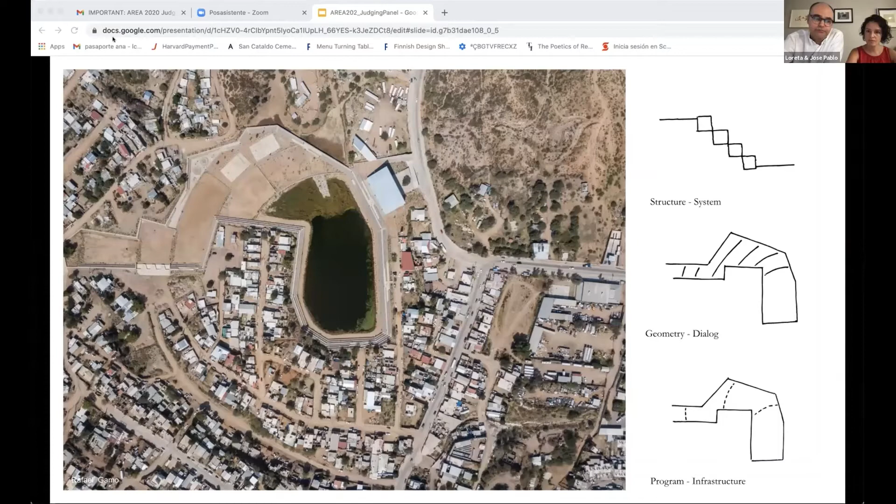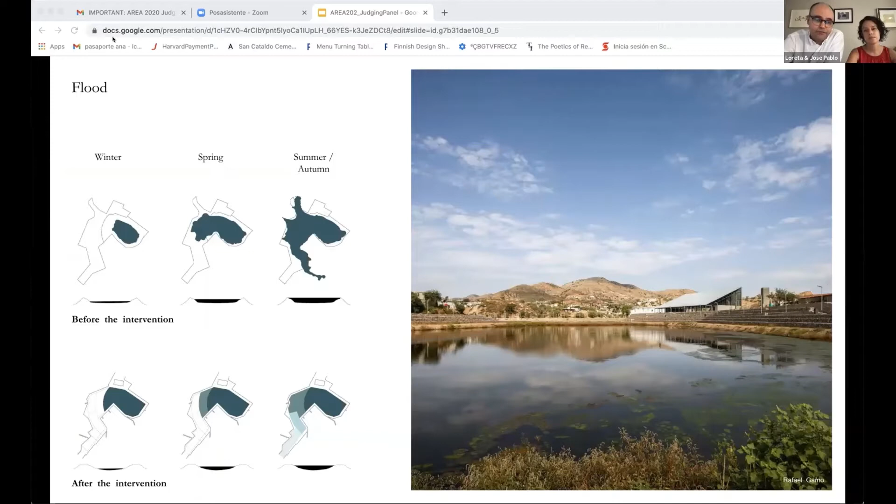Gabion became the system that solves both architecture and infrastructure. Linear geometries dialogue with the existing urban fabric, and curves suggest the presence of water. The new design prevents the cyclical flooding of the area. The system of floatable platforms and the rise of the perimetral wall address this condition. Besides serving as water infrastructure, gabion retention walls connect the surrounding settlement to pedestrian pathways.

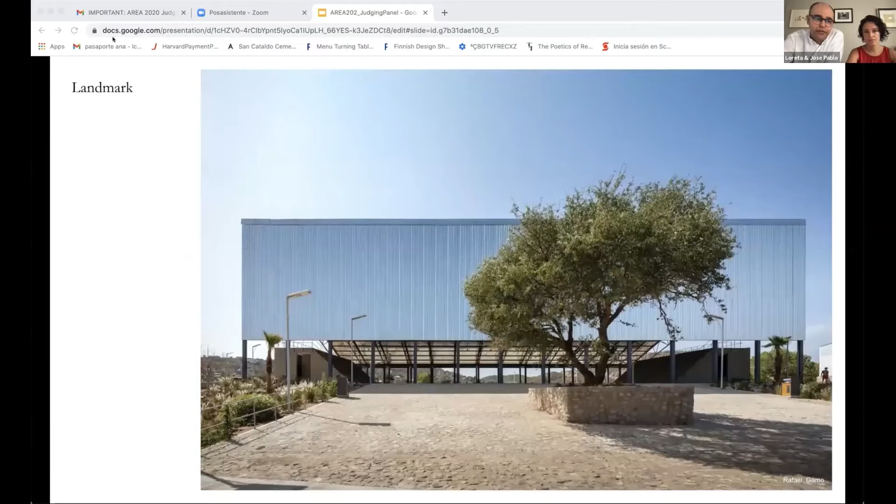The roof of the multi-purpose building weaves the urban fabric with the new public space. It also becomes a central piece of the identity and dignity of the community. Through the use of local materials and typologies, it is the facade that points the entrance and welcomes outsiders. Floatable platforms house sport courts and playgrounds.

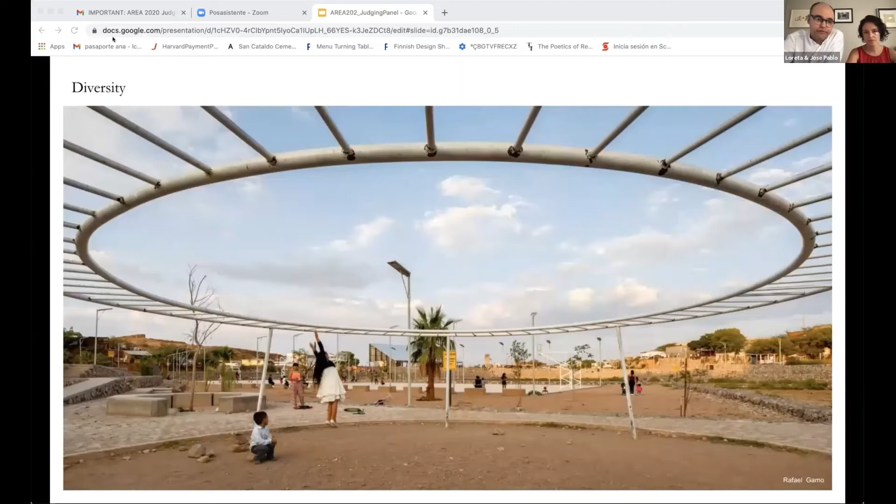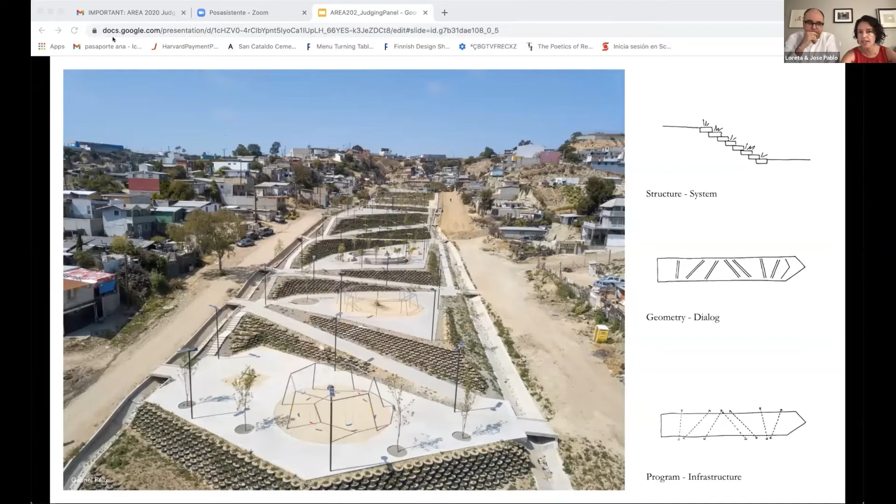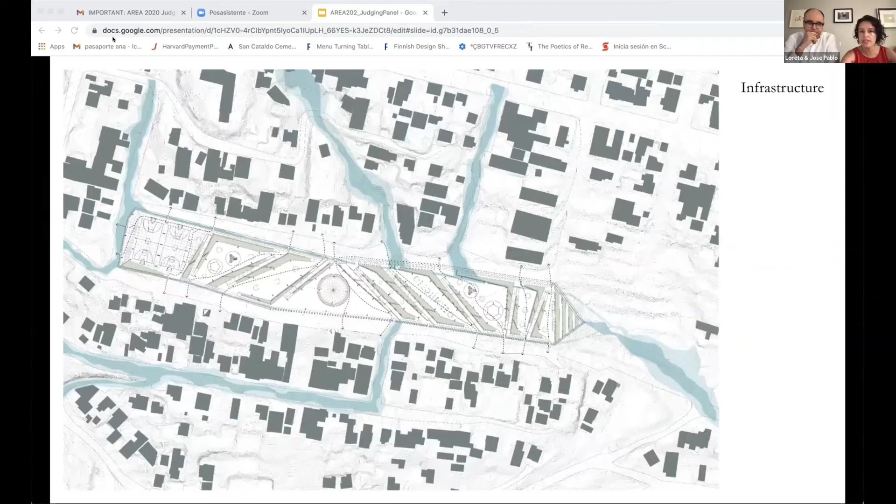In Tijuana, we were commissioned to design a park in a debris-filled streambed, piping the runoff. Instead of piping water, we channeled the runoff. We introduced the tire wall, a system that solves infrastructure and architecture. Geometry serves as a tool to reconfigure the terrain and dialogue with the community. The runoff is conducted through open-air canals along the stream bed's perimeter. Due to the low budget, we used the existing debris to form public spaces and control erosion.

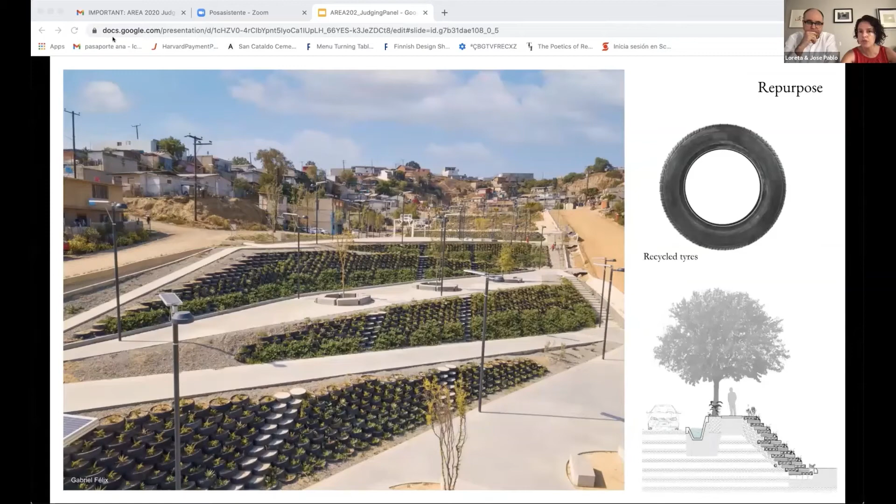Waste tires from across the border are commonly used to stabilize steep slopes throughout informal settlements in Tijuana. We use this typology to integrate the project and provide a sense of dignity to the community. Non-motorized mobility is now a possibility across the former debris dump, creating safe spaces in a crime-prone area. It became a two-phase project that started with a reduced budget, later expanded, covering 3 times its original area.

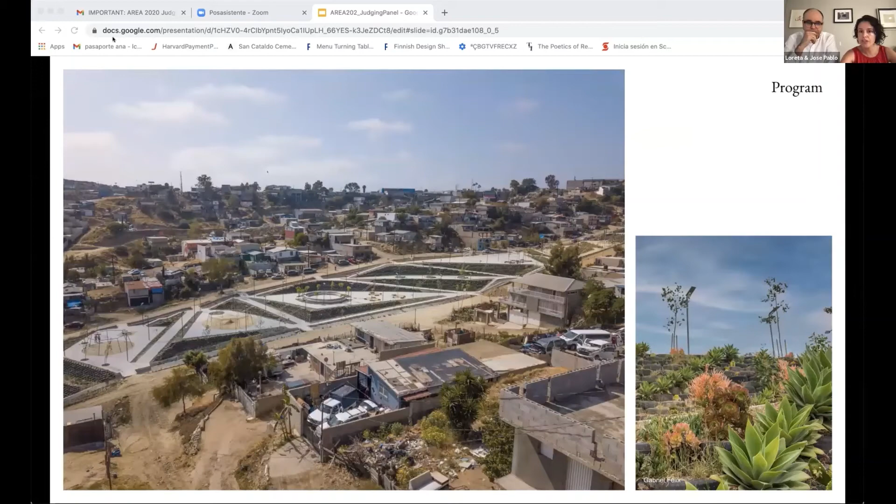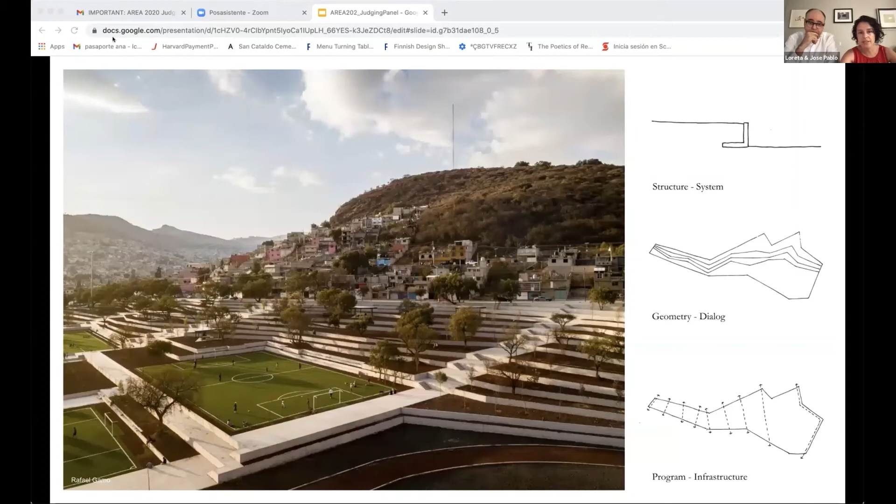In Ecatepec, we were commissioned to refurbish a fenced and abandoned park occupying the hillside of Sierra Guadalupe. A series of L concrete contention walls filled with local volcanic gravel shape the terrain and provide identity. Contour lines are transformed into filtration terraces. These serve as a sponge holding runoff and rain, filtrating it into adequate soil for aquifer recharge. Erosion is controlled while tree canopies are preserved and enriched.

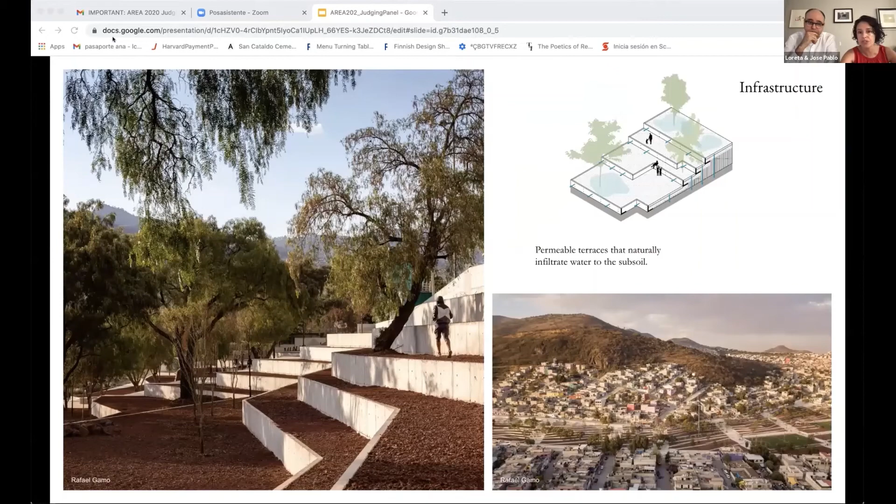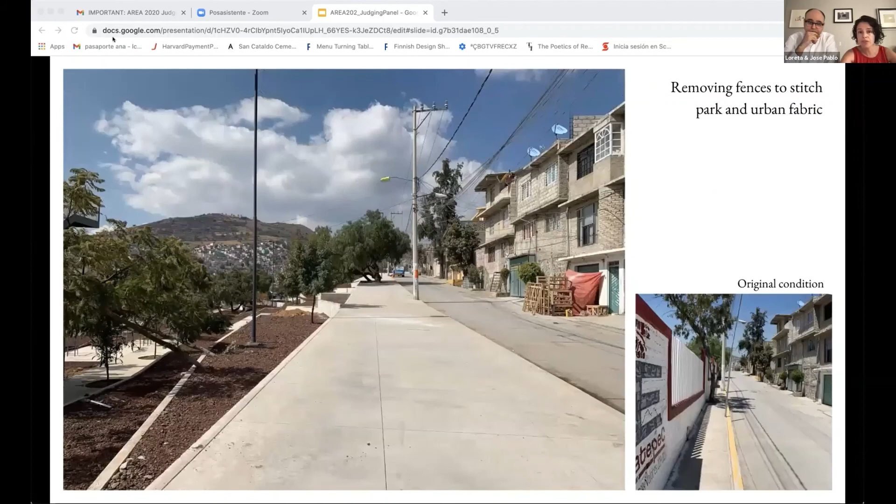The intervention weaves the northern and southern parts of the neighborhood through pedestrian and programmed pathways. The perimetral fence was entirely removed, stitching together city and park. Former dead-end streets today pass through the park, transformed into pedestrian walkways, benefiting from the local practice of well-kept streets. Traversal views are favored to restore the perception of security, removing eye-level bushes in the formerly blocked park.

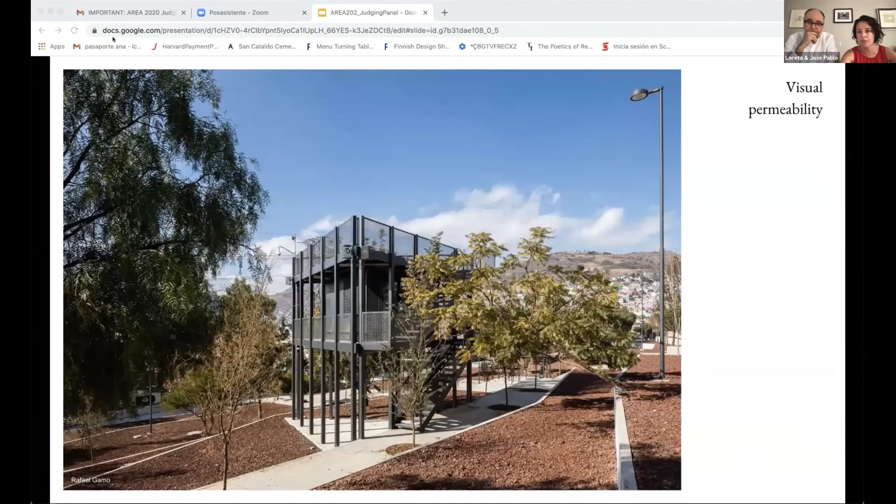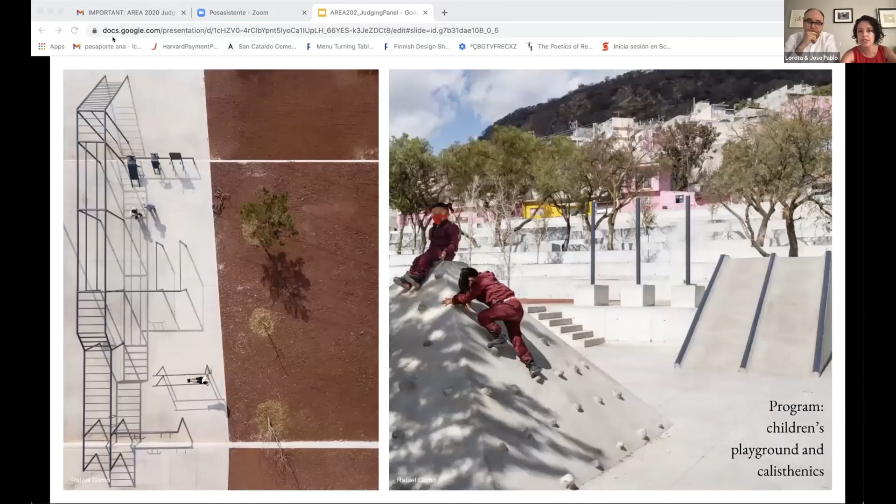A public watchtower and security point is introduced as an element where to see and be seen. Existing toilet structures were stripped and reused, favoring sun and sight-permeable secure facilities. Program for different age groups was designed from scratch. New symbolic shaded spaces were added as rest and leisure spots. Ongoing research nurtures the creative process, transforming it into a climbing spiral.